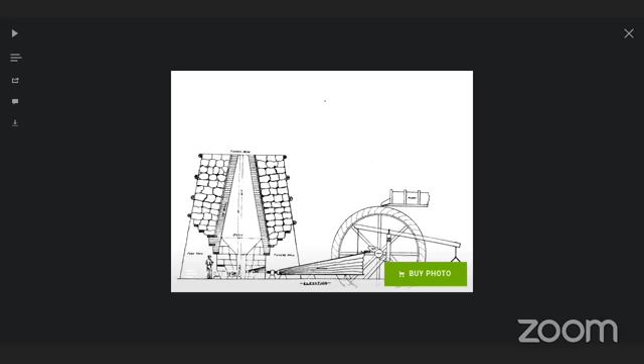So as the furnaces got bigger, if you had enough water, you could just add more water wheels. This one shows a wider water wheel and looks like multiple blowing tubs there. That's what they call the cylinders that actually do the compressing or pumping of the air. And in these days, colonial era, it was very low pressure.

So you have those crank arms extending off of the water wheel and driving rods that go up to crossheads, which take the crank motion and turn it into up and down motion, reciprocating in and out, driving a piston up and down inside the cylinder. Air comes in one side, gets pushed by the piston, leaves out the other side, and goes to the blast furnace from there. Very basic and simple operation.

This is what one would look like in practice. This shows the blowing apparatus at Hopewell Furnace. You can actually go there, once the virus is over, and see this in person. You can see the water wheel driving those elevated tubs up there, and the pipe in the upper top of the photograph connects the blowing tubs to the furnace.

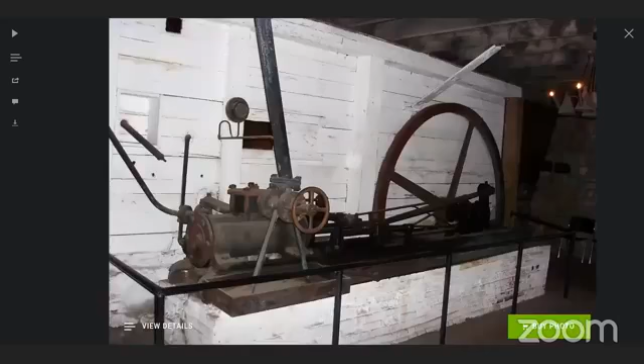So as blast furnaces evolved and got larger, and in other cases just kept on running and running, and having to face competition from new producers, management looked at ways of improving efficiency. One way was converting from water power to steam power. Water power could be unreliable if you had a drought, or some other use for the water.

But steam engines could take a relatively small amount of water, boil it, convert it to steam, and then the steam would be used in the engine to propel the blowing tubs, which would provide air for the furnace. So this is an example from Cornwall Furnace.

That was a colonial era furnace that had been around for quite a while, but they upgraded it in 1841 with a steam engine built by West Point Foundry. So instead of putting in a whole brand new design, they took the steam engine, extended the crankshaft through the wall, and geared it to a set of blowing tubs that look a lot like what you saw at Joanna Furnace.

So you have this basic 18th century technology that was just enhanced a little bit, and that served this furnace into the 1880s when it was shut down. You can see that same basic wooden blowing tub apparatus up there that pumped air into the furnace. But with a machine made of wood like this, the pressures were fairly low, and the furnace it was driving was only a few dozen feet high.

As furnaces got more advanced, they had to get air in at higher pressure to keep up with the competition. So what you see here is the next step of blowing engine design, where they got away from that colonial era wooden blowing tubs and water wheel setup.

This is a regular steam engine, fairly similar to a standard design as far as steam engines go. You could make the flywheel a little different, belt it up, add a governor, and it would function like in any factory setting. But what you started seeing in the mid-19th century was engines really designed specifically for blowing purposes, with the tubs integrated into the engine design.

You can see one of these furnaces here at Carrick Furnace in Metal, Pennsylvania. For those of you watching, you've probably heard about the East Broad Top Railroad - this is not all that far away from there. So if you're heading out in that direction, it's worth looking up Metal, Pennsylvania, and you can actually see this from the side of the road.

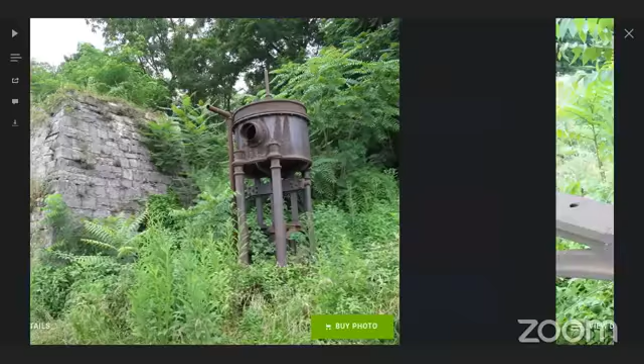So they had an older charcoal furnace that they wanted to keep running in the 1870s. In 1879, they purchased this blowing engine from Weimer, a company that specialized in producing these types of engines. It's completely vertical in nature. That blowing tub is just like those colonial furnaces at the very top, but now made of cast iron, and the steam engine was directly connected to it with a piston rod that went from the engine cylinder, at the bottom of the blowing engine, straight up to the top.

And there was a crosshead that would drive a pair of flywheels down at the bottom. They're a bit obscured by the weeds, but you can just barely see one poking out there. But this design lasted for decades, the general arrangement at least.

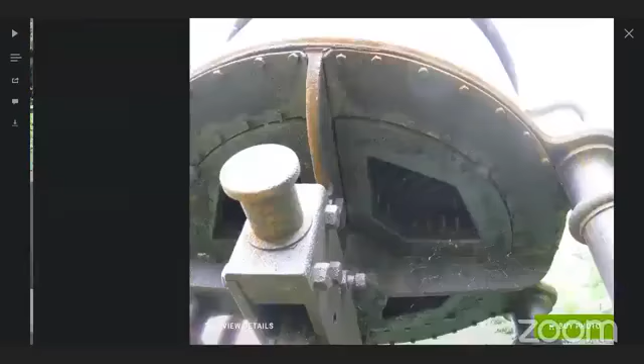So we can move on to see what was common in the 1890s. Actually, along the way, I forgot about this image - this is another variation from that same manufacturer. They put the steam engine horizontally, and added a second blowing tub, connected on the outside of the flywheels. This is a very common type of blowing engine from the 1870s, 1880s era.

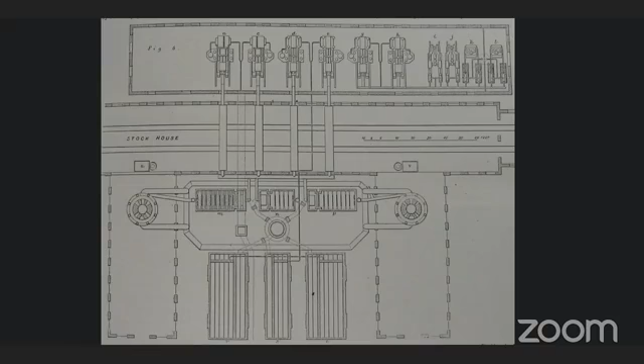Now in Bethlehem, the first blowing engines were built by the Bush Hill Iron Works in Philadelphia, but by the 1870s, Bethlehem had advanced to the point where they had their own foundries and machine shops, and they were in a place to build not only their own engines, but furnaces and buildings from the ground up by themselves. So Chief Engineer John Fritz, as he was planning the new pair of blast furnaces, number 5 and 6, in the 1870s, decided that he was going to take a crack at establishing his own blowing engines.

They were not shut down because they were worn out. They were continuously maintained, but they were shut down because they were lacking in efficiency compared to much more modern technology. When you look at period literature from the time these things were replaced, they were wondering what's going to come around in 10 years. Would it be gas engines, turbines? What was going to be the thing that would supersede the technology that was replacing these things? And they figured that no matter what they did, the machinery was going to be so well built and maintained that it would be as good as new the day they took it out of service. And that would only be happening because something better came along.

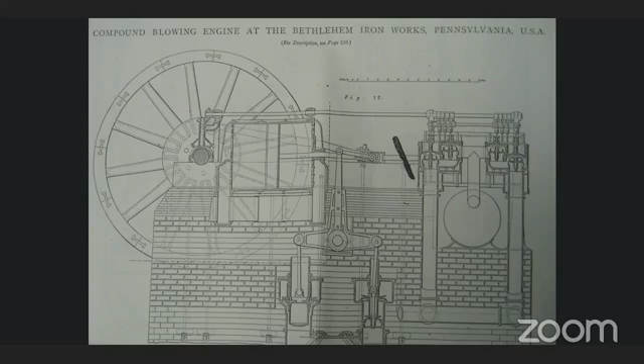So what we notice about this engine compared to the other ones is this engine has a much larger flywheel that helped it maintain momentum much better. And the engine itself is off on the right. The blowing tub is just to the right of the crankshaft in the middle of the flywheel. And again, it's a fairly simple construction. Piston rod goes from the engine to the blowing tub, and it moves that piston back and forth all day long, pumping air into the furnace through the stoves.

What made this engine unique, though, is that compared to those earlier engines, which were all single cylinder, this one is 2 cylinders. You can see it right here. Small cylinder, this is on the left-hand side of the photograph I'm looking at. Small cylinder on the right, big cylinder on the left, joined together. And you can see faintly the big blowing tub behind them. This is a compound engine, so the steam gets used in the small cylinder, and then it gets piped to the larger cylinder used the second time. It's the same basic process that the Corliss steam engine in the museum today uses.

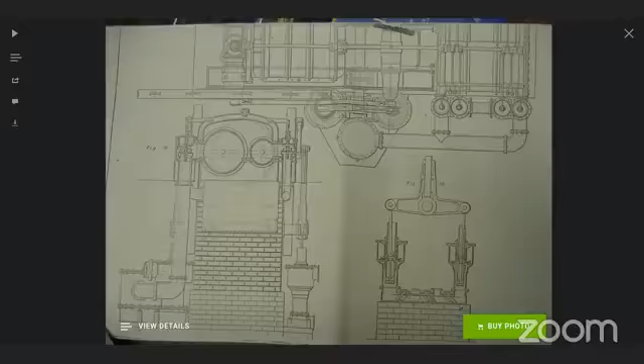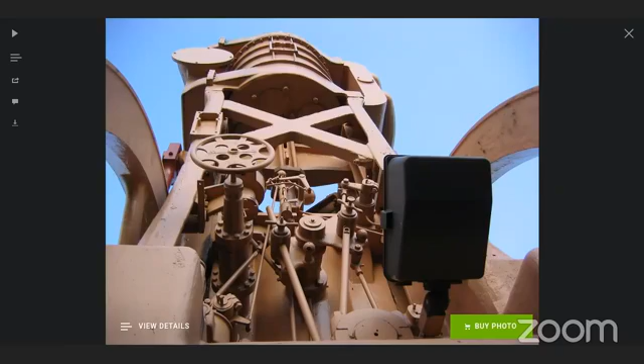Again, the same type of valve gear on the big steam engine inside the museum today. The Corliss valve gear allowed the engine to have a much lower fuel usage rate, which was important in the steel mill because they were burning blast furnace gas, which is a byproduct from the furnace, under boilers to make steam. And the less steam they could send to the engine meant more steam available for other purposes.

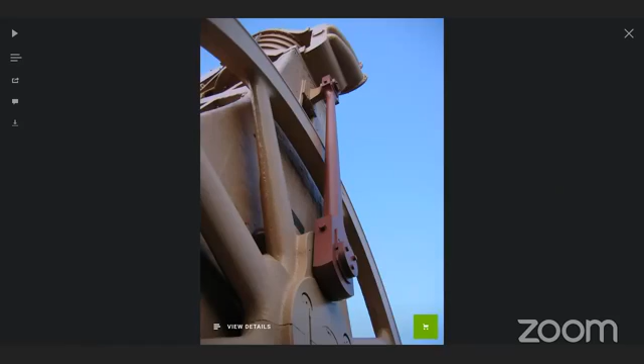So you can see pretty clearly here, you've got the steam cylinder on the bottom, the cross head that goes above the flywheel, and then rods extend down below that to actually rotate the flywheel. And all the flywheel does is maintain momentum and keep the engine running smoother. Because if you didn't have that flywheel, this would be just strictly reciprocating motion, starting and stopping. The flywheel helps the engine spin around much more freely and carry it past those dead spots at the top and bottom of the stroke.

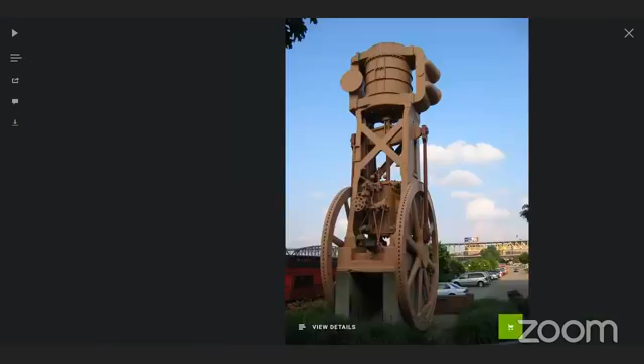Just a few more views of this engine. This thing is really massive. I think the flywheel's somewhere in the neighborhood of 16 to 18 feet in diameter.

When these were set up in a furnace situation, you might have one for a very small furnace, but typically furnaces were built in groups of 2, 3, 4, or 5. Bethlehem even had visions of 8 furnaces on their planning books at one time. So these engines would be installed in rows.

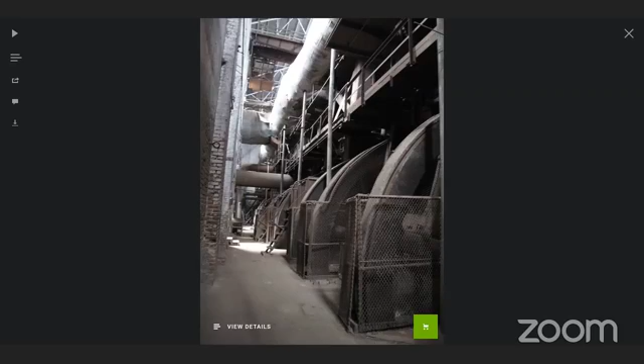The flip side of that is it also makes the engines much more difficult to work with. So if you have to go and do a repair, you have a lot more difficulty getting access to those parts.

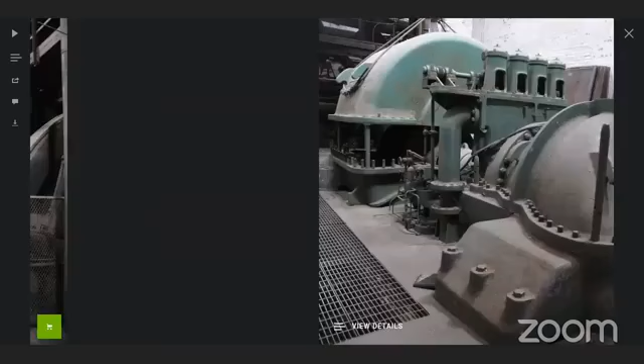Now we're skipping ahead a little bit here, but since we're still talking about steam engines, this is a good point to introduce what ultimately ended up surpassing the actual engines themselves. When you think about engines, you have all of these reciprocating parts moving up and down, starting and stopping, and the complicated valve gear mechanism to control the timing of when those events happen.

But if you can have a steam-powered turbine blowing the air, then your operation gets a lot simpler. In the early days, these really weren't cost effective, but as they got much more powerful over the decades, they eventually became the industry leader and are in use at the blast furnaces that are still in use today.

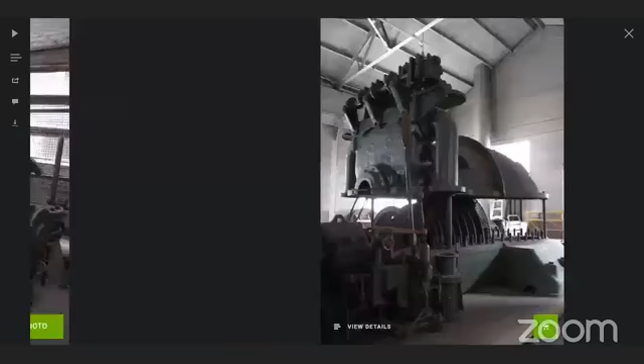So what you see here on the right-hand side of the image is a steam turbine, and on the left is the actual blower mechanism. This is again at Sloss. You can see the turbine's been lifted up, so you can see the turbine blading exposed.

The steam would actually go in, hit one blade of the one set of the turbine, exhaust into the second series of blades, and on and on. So that steam would get used multiple times. The device you see at the very top is a governor.

And this is what the turbine rotor looks like from the Bethlehem turbo blowers. There used to be 3 of these in Bethlehem. We'll hopefully discuss those a little bit later, so they make sense in terms of Bethlehem's evolution. But that's what's left of one of the Bethlehem turbines.

This is the actual blowing end. Notice you'll see a good local name on that, Ingersoll Rand. They built a good number of these turbo blowers. One of their primary businesses was making machines for compressing air. And these turbo blowers basically did the same thing.

The boundary line between, traditionally at least, when you say something's being a compressor versus a blower is about 30 pounds per square inch. So in the mid-20th century, you're getting blast pressures up to about 30 psi. And even at lower pressures, the same basic technology of compressing air is what you're doing, just you're emphasizing volume over pressure with these types of engines.

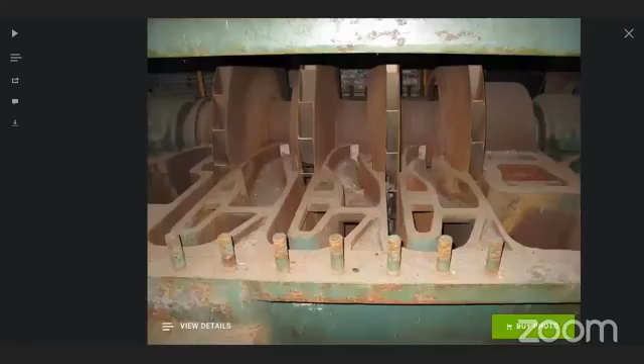So this is a look inside that turbo blower casing. You can see 1, 2, 3, 4 units in there, and they pick up the air, spin it around, pump it out the other side at a high pressure. And these things could get up to some really impressive numbers of cubic feet per minute.

Like the Bethlehem turbines, they could do well over 100,000 cubic feet a minute. So to put that in perspective, the average person breathes about a little over a quarter of a cubic foot of air per minute. So we'll keep that in mind as we go down and hear about some of these figures with the engines themselves later on.

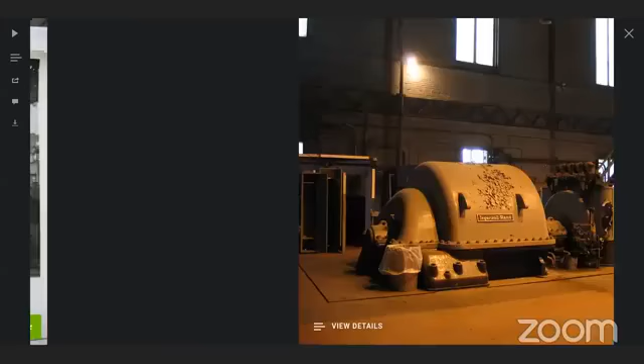As I mentioned, these things are really the mainstay of the modern blast furnace blowing plant. This is a shot from a pair of turbo blowers at Wheeling, Pittsburgh, Steubenville, Ohio operation. It's been demolished, but you can tell that these were maintained and operated well into the modern era.

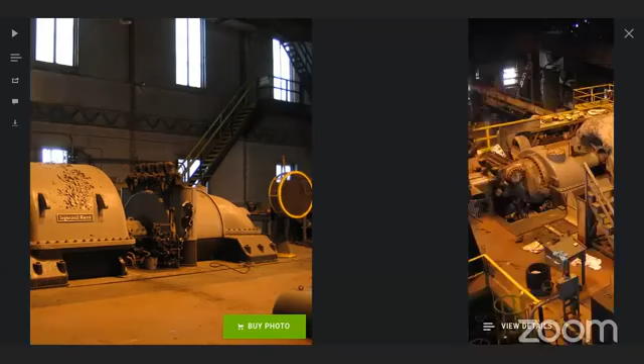In another view, you can see that these turbines take up a relatively small amount of space compared to the engines that we're going to start seeing momentarily.

One important thing to note about those engines is that they run on steam. Same thing with the turbo blowers you just saw, but the steam has to be made somehow. It comes from gas, which is a byproduct of blast furnace operation.

The gas is mostly carbon monoxide. You can see in this chart the raw materials going into the blast furnace: almost 2 tons of ore, a little over a ton of coke, and almost 5 tons of air that gets pumped into the blast furnace to make a little bit over 1 ton of iron.

So when you look at all that air flowing into the furnace, you have to look at what's coming out of it, and you're getting well over 13,000 pounds of gas associated with every ton of iron you make. That gas is mostly carbon monoxide, and it has a BTU value of about 95 to 100 BTUs. That's British thermal units, a means of measuring how potent the gas is.

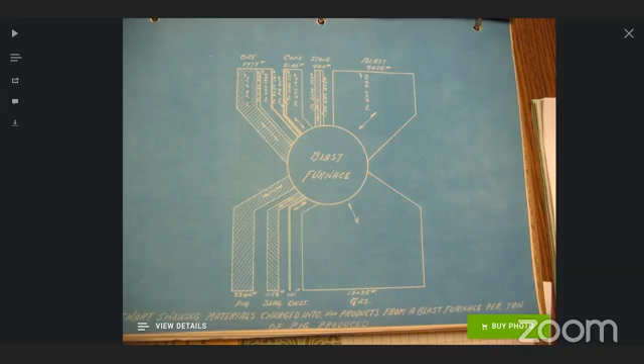For comparison, natural gas is a little bit over 1,000 BTUs. So even though this was only a tenth the heating value of natural gas, you have so much of it that if you can harness it and use it, you basically get free fuel.

When Bethlehem Iron Company and Bethlehem Steel were trying to figure out how to deal with their expansion plans and fuel the plant, they were looking at their boilers for their steam engines at the time, and they realized that some of the steam was coming from coal-fired power plants, and they were spending upwards of $1 million a year on coal.

But if they could harness that blast furnace gas a little bit better from their bigger furnaces that they were planning to build, they could put that blast furnace gas to use - not in boilers that would inefficiently convert the energy to steam, but take it directly to the engines.

So they started looking at what the Europeans were doing, because fuel costs in Europe were much higher at the time. The Europeans were a little bit further ahead in their development of gas engines that could utilize blast furnace gas as a byproduct from the furnace.

They looked at some of the leading examples in Europe and found a Nurnberg design of engine. They decided, along with a lot of other steel companies in the United States, that this was really the way to go. If you think about your automobile engine, this is really comparable to a 4-cylinder car engine. It looks a lot different, but it functions in the same basic fashion.

Instead of having 4 independent cylinders, this has what they call 4 cylinders arranged - and this gets a little confusing - but for practical purposes, 2 double-acting cylinders. This is an exploded view showing how you would pull the parts out for installation or repair. You have a cylinder on the left, one in the middle, and then you have your crankshaft on the right.

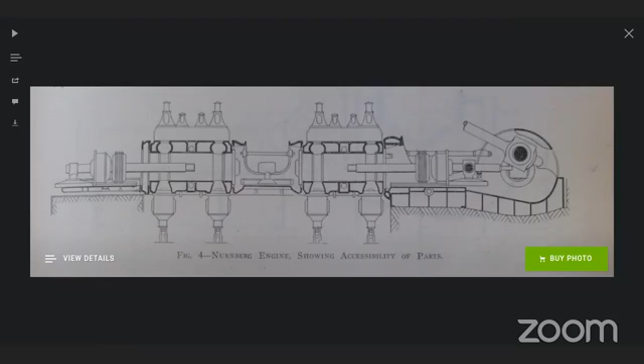But basically, if you didn't do this, you would have 1 cylinder making 1 stroke, and then you'd have to let the flywheel revolve 2 times before it could come back and start the process over, because you have to suck gas in, compress it, ignite it, and then exhaust it - that's your 4 cycles. So if you can have 4 places on the engine where this is happening, there's always one of those places where it's going to be firing and actually making power.

So Bethlehem was not the first company to build these engines in the United States. There were actually several.

Sorry about my computer freezing again.

This made access to the cylinders a little bit more difficult than it had to be. But it might have saved a little bit of space. So there were always trade-offs that you were looking at in producing these engines.

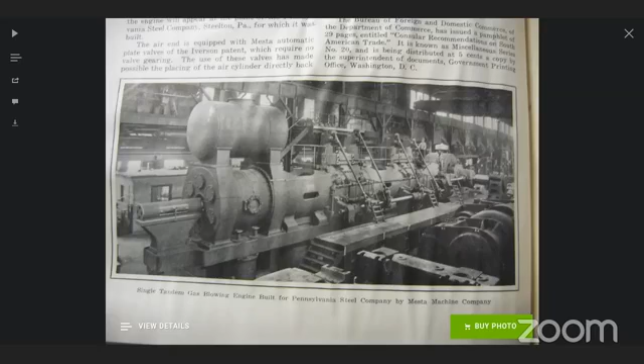Back when they were first built, they were figuring one furnace would require 2 engines to supply the air to it. And then for every 4 or 5 furnaces, you would have a spare engine, because it was inevitable at some point one would break down. You'd have to do routine maintenance, like changing the points, or in later years, the spark plugs. So you always try to keep a reserve on hand.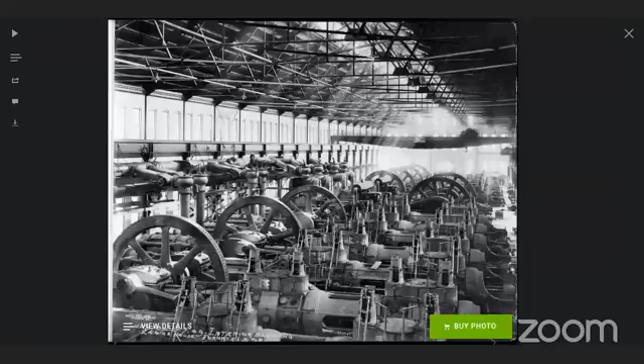This is just another view showing how large these places could be. When you have several furnaces, these powerhouses really started lengthening almost to the point where it's hard to see the end of them and hard to count the engines. Bethlehem at its peak had 17 blowing engines, all at the same time.

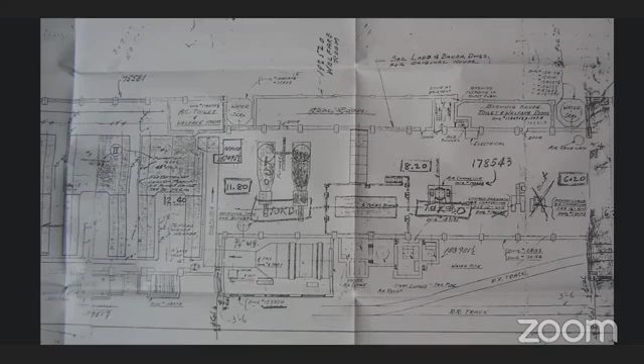They were gradually replaced by the turbo blowers, because when you look at the mathematics behind it, there was just no competition between these engines and the much more modern turbos. You can also see that they were in a much narrower space. The circles, hopefully I can zoom in on them, were for blowing tubs that were vertical, so they didn't need as much of a horizontal footprint. So this building was actually narrower.

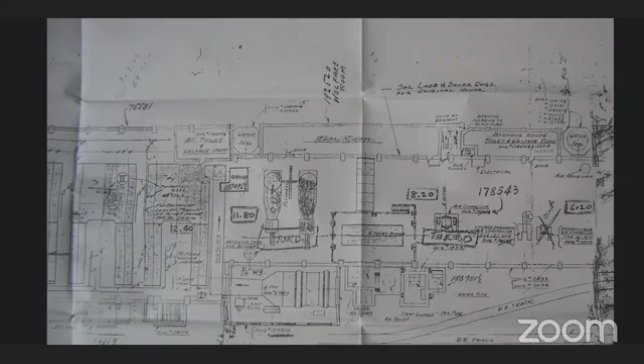And after this engine was taken out, you had the turbos take their place, which were even smaller than those engines. But you can look on the left and see another gas engine powerhouse that made electric power, but the same basic design of engines. You can see the footprint is much, much wider. And the footprint is actually a big deal in these engines.

In Bethlehem, that design just barely worked. They were able to come fairly close to the railroad tracks, but not interfere with them. But in other facilities, they actually angled the engines to make them fit.

One thing that you can note in here, and we'll talk about this later, is the exhaust gas tunnel. The engines today have individual stacks, but there used to be a tunnel that funneled the exhaust gases to a central stack. A few more architectural drawings showing the width of the building, how it's constructed.

And again, that placement against the furnaces is key. You can see 1, 2, 3, 4, 5 big pipes on the outside of the building. Each one of those pipes goes to a blast furnace, and those pipes are what carry the air from the blowing engines to the furnaces.

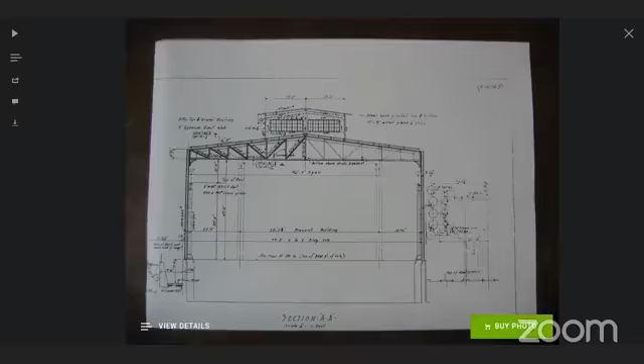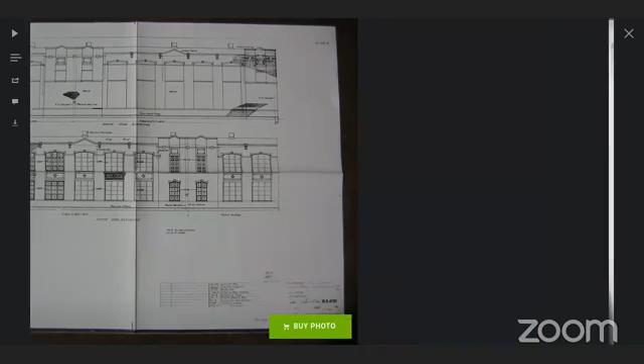And the building was absolutely beautiful, and to this day, it still is. Brick construction, windows, it was very bright on the inside. It was actually illuminated from both ends of the building. And white tile on the inside. It was really, really, really classy.

And it had a sister building, we hopefully can talk more about this at another time, that made electrical power with the same basic types of engines. And this one even had a very nice concrete sign cast right into the building. It said gas engine powerhouse. And when this building was demolished, the concrete piece here was actually salvaged, and we have it in storage for the museum today.

If you're looking at old photographs, you can tell the difference between them, because there are 7 AC engines, and they all had waste heat boilers, which were these boxes outside the buildings, whereas the blowing engines, there were 17 of those, and only 4 waste heat boilers associated with the more modern engines. And then between them was this narrower section that had the Southwark steam engines, and in later years, the turbo blowers.

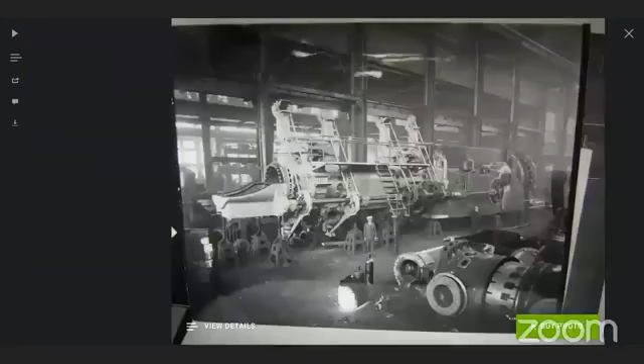So again, Bethlehem had a tradition of building things themselves. So when it came time to invest in gas engines, they thought about it and decided why buy from another company when they had the facilities right here in Bethlehem to build their own. So that's exactly what they did. They had foundries within an ear shot.

The building that used to house the Bessemer converters by this time was doing iron castings. Number 4 machine shop, I believe it was, one of the machine shops directly nearby that foundry, it's gone today, was in a position where they could actually do the machine work on these. Number 2 machine shop did repair work for them. And you could actually build and maintain these things right on site.

So this is a photograph taken as one of the engines was under construction. You can see they have it up on stands as they're in the process of test fitting everything together. And you can also see a cylinder for a second engine in the foreground and other components scattered around. We're going to move now into the actual engine house itself and start discussing how these things actually worked.

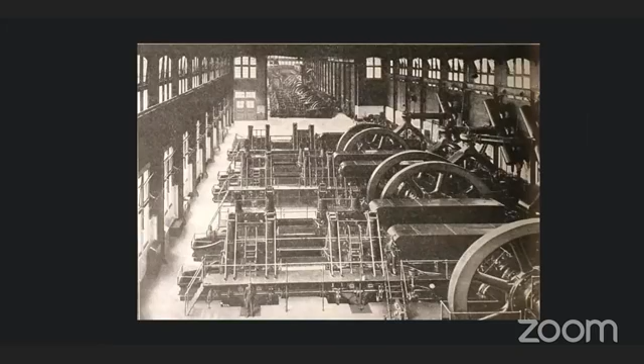So this is a view of those first 5 engines that were installed and actually got put in service in 1911. You can see the building gets narrower, and then there's a bunch of other engines in the background. Those were electric generating engines from a slightly earlier time period, and those eventually got torn out. And the Blowing Engine house expanded, and the current engines replaced those engines. Then you have the Southwark steam engines, those vertical horizontal engines. I'm trying to zoom in on that image so you can see them better.

Well, it's not letting me zoom in, but anyways, in the far back of the photograph, you can see those flywheels, and there's a vertical component there. Those are the blowing tubs for the steam blowing engines, and that's about the spot where the overlook exists today on the Hoover Mason Trestle, where you'll be looking into the Blowing Engine house that has since expanded into that direction.

So Bethlehem didn't build engines just for the Bethlehem plant. They also built them for the Maryland Steel Company, which eventually became a wholly owned subsidiary of Bethlehem Steel, which was their Sparrows Point plant. They built them for the Lackawanna plant, and several other installations throughout the country.

So the way these engines work is they're horizontal engines, and the parts inside them are so heavy that instead of the piston carrying the entire weight inside the cylinder, they actually have a piece that comes out called the tailpiece that rides on the slipper on a track or guideway that takes some of the weight off. They have a second one of those hidden away in the middle of the engine.

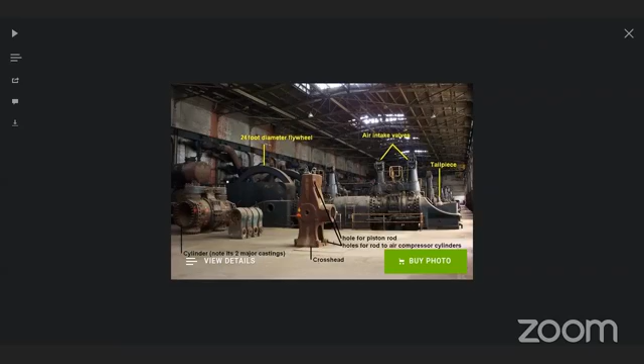Then a third one, which is, you can see a spare example here labeled crosshead, connects to the piston rod on the right. And then at the top and bottom, there's holes for additional rods that connect back to another crosshead, which then in mirror image feeds into a piston rod and piston for the blowing cylinder. You can see air intake is up on the top.

And I wanted to throw this in just so you guys can read it momentarily. But this is a page from the manual that shows the engine sizes, gas engine cylinders. They're 42-inch diameter on the smaller engines, up to 47 inches in diameter on the big engines. And again, this is because they were burning blast furnace gas, which had a relatively low BTU value to it. If you were burning natural gas that was much more potent, you could have a smaller cylinder and get the same amount of power. But with the blast furnace gas, you had to have a larger cylinder to get the same amount of energy out of it.

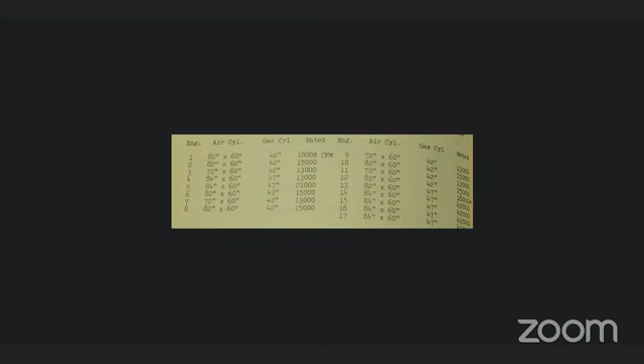They're rated in cubic feet per minute, so the smallest engines were about 13,000 cubic feet per minute. And if we go back to our example of how many cubic feet a minute a person blows, which is a little over a quarter of a cubic foot per minute, it would require about 48,246 people to equal the capacity of the smallest blowing engine. And if you think about a hot air balloon, an average size hot air balloon might have 65,000 cubic feet of air inside of it. So a small blowing engine would take 5 minutes to pump that much air, but one of the larger engines in Bethlehem would only take a minute and a half to do the equivalent of filling up a hot air balloon.

So the cylinder is down at the bottom. We're moving on the left-hand side of the image. You'll see this slightly convex valve down there. That's actually a poppet valve that moves up and down. And that's what seals off the cylinders from the airflow. Then you have a series of springs up on top. And then there's an arm at the top that gets activated to push that valve down. So when that valve comes down, it brings in a mixture of air and gas. We can zoom in here and see how that air and gas actually comes in.

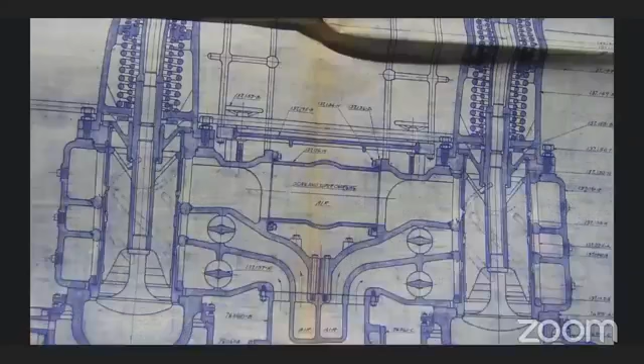The gas is piped in from the basement, and that's a very dangerous place to be. If there was ever a leak, you could get overcome by carbon monoxide pretty easily. So if anybody ever had to go down there, they worked on the buddy system in case somebody didn't come back up. They could run down for help. It goes through valves, and then it gets mixed in the chamber up here, and you have a sleeve valve here that rotates around. This is a very interesting situation. The sleeve mixing valve has these spirals cut into it, and as the engine throttle operates, it twists this sleeve, which is aligned vertically, back and forth, and that automatically adjusts and maintains the proper proportion of air and gas mixture. And you can throttle it up and down depending on what your load was like.

Even though these engines had to run basically continuously, the furnaces themselves didn't always need the same amount of air. If you were going to be tapping the iron out of the furnace, you would want to have less air blowing, so you're not having a rush of air pushing that iron out. You wanted to have that much lighter, so the engines would sometimes have to be throttled back. So by twisting this valve, you can control the amount of fuel and air that comes into the engine. And then as the valve itself moves up and down, that actually does the admission. And then there's a similar setup, but without the twisting sleeve at the very bottom for the exhaust valves. This is what it looks like looking down into there. So you can see the different passageways where the air and gas would come in.

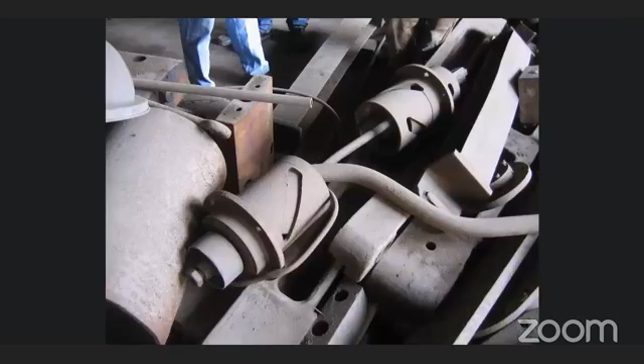And these are some of those sleeve valves that would actually twist back and forth, depending on how much fuel and air you needed to mix into the engine.

A shot of the exhaust valve looking down, and you can see again how beautiful this engine house was. Even in the pits underneath the engine, they were lining them with red quarry tile, and it looked beautiful.

Up until the late 20th century, this was a place where you could go in, and multiple people have said you could eat off of the floor of this building. They had mops stationed by the engines. The brass was polished. These guys really took a lot of pride in their machinery. And when the president of the company came to visit, this is one of the places that they would show off to him and to visitors.

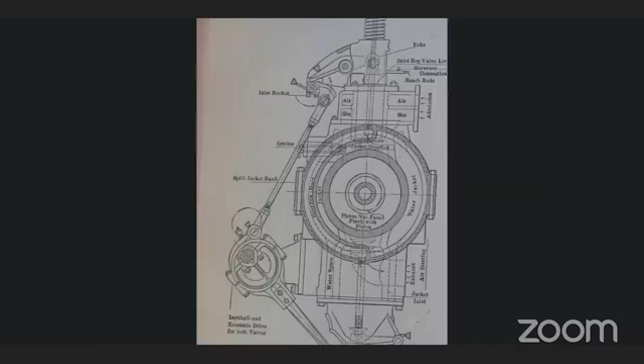This is just another example of showing that cutaway of how the fuel and air came into the engine. The exhaust valve is a little bit more visible here. You can see the eccentric shaft alongside the engine, just like the Corliss steam engine we have, it has eccentrics. You can see it in the lower left here. They revolve around a shaft and provide a linear motion from the straps around them that open and close the corresponding valves.

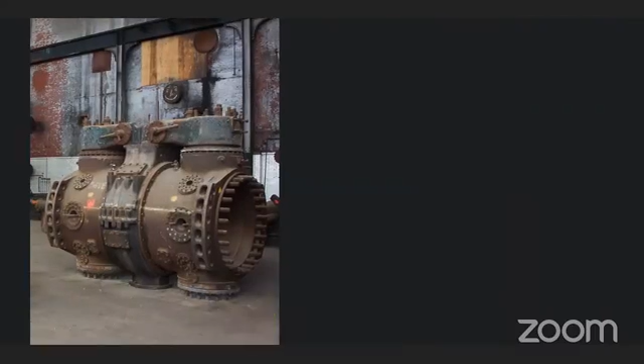The cylinders themselves are very unique too. You'll notice this isn't one cylinder - well, the cylinder isn't made from one casting, it's made of multiple pieces. You have your front, your back, and there's probably different technical terms for these, but this is easier to explain in this image, and then this piece that clamps down around them. So when you look at that in cross section, you can see you have your left and right pieces, and they're joined together in the middle by prisoners, or dog bones, depending on who you're talking to. These are pieces of steel that have been heated up, put into place, and shrunk down, and as they shrink, they bind this together very, very firmly.

These castings were subjected to such tremendous temperature differentials that they actually made them out of steel. And then only the actual cylinder liner, which is the tube inside the cylinder castings, was only made from cast iron. And then you can see that the piece that clamps around it is the gas passage, and to the left and right of that, you have a hollow space, again, inside the cast iron cylinder halves, that's filled with water to keep the engine cool.

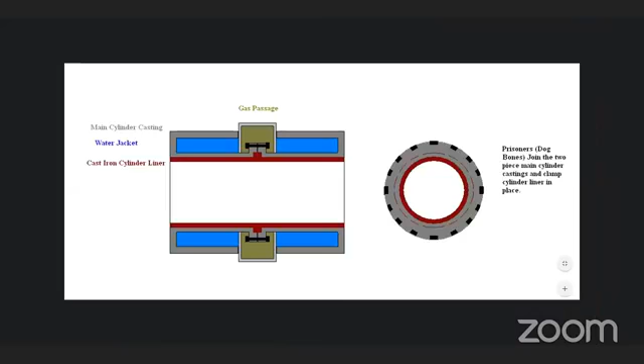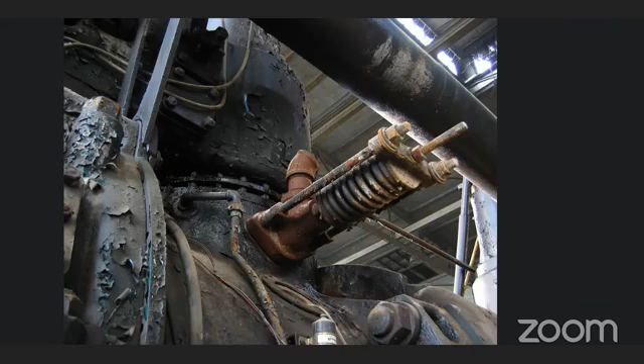The pressure inside the engines was supposed to be about 350 PSI, that's pounds per square inch, as the explosion occurred when the gas was ignited. If the pressure got a little bit too high, then this safety valve up here would go into action. The valve would open up against the spring, and the excess pressure would be released into the room there.

Now, the exhaust temperature was so intense on these things that you could actually take the exhaust at 1250 degrees, and on the larger engines, run that through waste heat boilers and make steam. So between the 4 boilers here and the 7 boilers with the electric generating engines, they actually made 8% of the plant's steam needs. That was very helpful in running turbo blowers and other steam-powered devices, and again, saved a tremendous amount on your fuel bill.

And when you looked at the efficiency of these engines, the gas engines operating by themselves were about 25 to 30% efficient. But when you added in these waste heat boilers, then you got an efficiency of around 50%, which was really, really good even in this day.

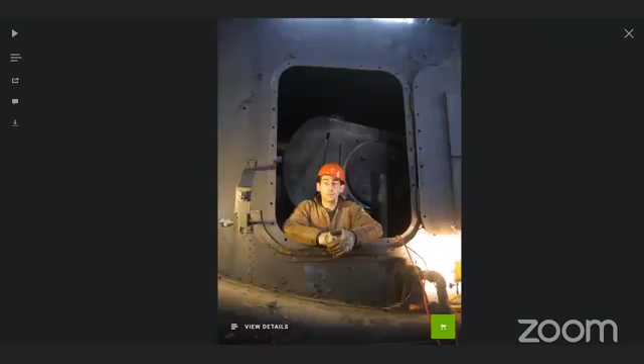So after you get the reciprocating motion from the pistons, you have your crosshead that takes the motion to a driving rod, which spins a crank. All of this stuff is enclosed in shrouding, so it's a bit hard to see. But whenever volunteer Rick Rowlands crawled inside there, this is probably 10, 11, 12 years ago, you can get an idea from him just how big that crank is by how it dwarfs him.

These engines have a 60-inch stroke, so that means every time the piston fired, everything inside moved back and forth 5 feet.

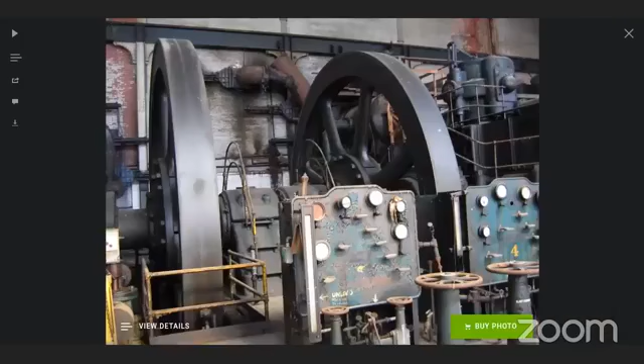Between the motion and the heat, these engines were mounted a bit differently than other ones. The casting that he's standing in, the frame of the engine, is bolted down and anchored over 12 feet deep into the foundation, with concrete still deeper below that. Those anchor bolts hold down the frame of the engine, but the actual cylinders sit on a track so they can move linearly and expand. There wasn't a whole lot of expansion, but enough that if they were bolted down, you might break the bolts or cause damage, so they wanted the engine free to expand as it grows.

The early engines were single engines, meaning you had your gas cylinders, your air cylinder, and a flywheel - one engine and one flywheel. They thought this was a very logical way of going about it, and it saved on cost for producing the pieces, but these engines only had about 1,500 to 1,800 horsepower. They were happy with that in the early years, but by the 1920s they realized that if they built bigger engines with bigger cylinders and combined two engines into one, they could reduce two flywheels into one and have what they call twin engines, with a left-hand and a right-hand side engine tied together by a common crankshaft.

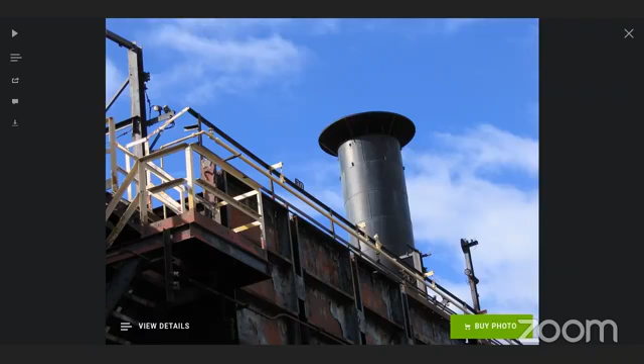So we talked about the actual power of the engines. Now is a good time to talk about the air. If you're on the Hoover Mason Trestle, you can look up at the eastern end of the engine house and see this big thing that looks like a smokestack. That's not a smokestack - that's actually an air intake stack, located as far away as they could reasonably get it from the blast furnaces. Even with all those dust control measures, there was still dust, and you wanted that air to be as clean as possible. So this stack took the air and funneled it into the basement of the building.

By this time, the blowing engine house with the reciprocating gas engines was 540 feet long, plus an extension for the turbo blowers. If you only had 2 guys in the entire building, odds are you're not going to be able to keep as good an eye on things as you might want to. So when you compress air, the air heats up, and if you keep compressing the same air, the heat keeps building up and building up. If there was a malfunction and you weren't watching that temperature gauge, the thermometer there, the temperature of the air could get to such a point that the lubricating oils left over would actually ignite.

And that's what happened in 1993. They had a fire in the cold blast main, which for practical purposes really amounted to what I would call an explosion, even though it was technically a fire. That blew out some fittings, a valve on top, and did some other damage. You can still see that from the Hoover Mason Trestle today when you look into that blowing engine house.

After they had compressed the air, it was sent into an air reservoir tank and then through what they call a Dibley valve. This was named for the chief engineer of the Joliet plant of the Illinois Steel Company, who invented this special valve that would automatically lift up and pump air into the mains going to the furnaces. But it was also designed so that if the engine shut down, the valve would automatically close. It has a counterweight positioned just right so that the valve would descend slowly and not come crashing down.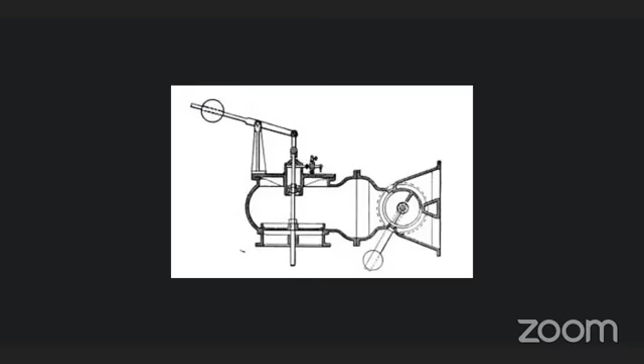So after it lifted that Dibley valve, it went into the manifold here. You can see 1, 2, 3, 4, and there's a 5th on a lot of these. These are valves that take it to the various furnaces, so you could actually have any engine blown by any furnace or any furnace blown by any engine. That gave you a lot of flexibility.

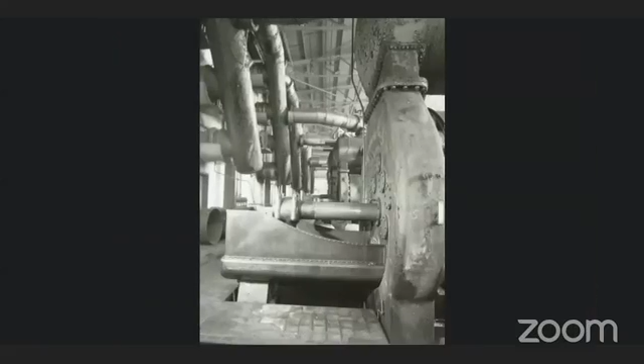And of course, at the other end, you have these blowing pistons. They're about 72 to 84 inches in diameter, depending on the engine. And again, they had this cross slide on the back, the slipper, that would allow you to take some of the weight off of the actual piston and reduce the amount of wear on it.

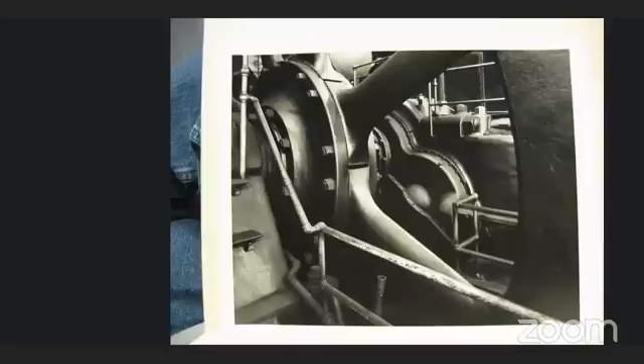These early engines were 1911 versions, the singles, which stayed in service until the very end. But in 1927, they expanded the engine house and put in the twin engines. You can see in comparison to the singles, which had 2 flywheels, really one for each engine, just side by side, mirror images of each other, the twins have 1 flywheel. By the time you added in the larger cylinder diameters, you're looking at about 5,000 horsepower coming out of these engines.

Unfortunately, I don't have a record of this worker's name, but he's standing at the control panel here. These were shots by Joe Elliott, and you can actually see what the workers had to manipulate to control the engines.

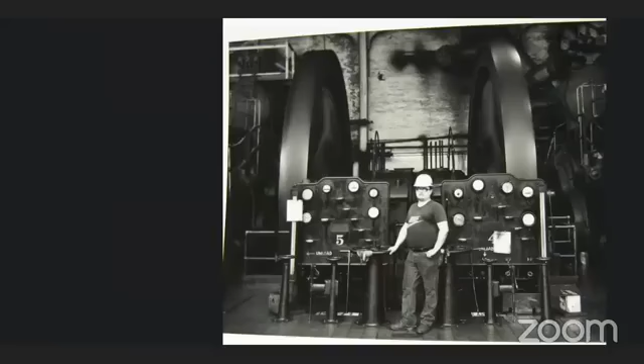You can probably zoom in on this picture a little bit easier than those ones. This shows one of the engines that had some restoration work done to it, and you can see this big valve here. This is for 2 single engines, so you have engine 10 on the right and engine 11 on the left. Blast furnace gas, which is the fuel for the engine, and compressed air to the right of that. What I believe is a quick starting valve for getting the air going. And then you can read the controls on the furnaces.

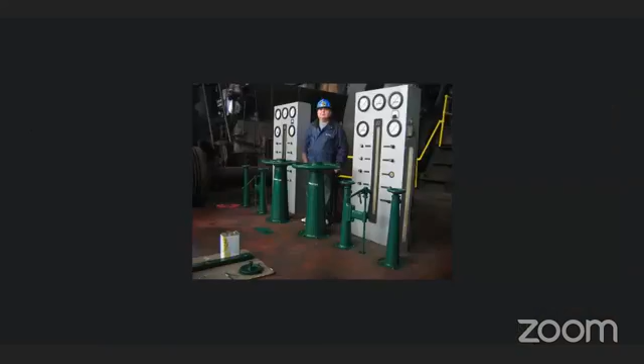Controls on the panel board here. You can direct air to the different furnaces you want. You can check your temperature for oil pressure, how much wind is coming out of the engines. So you can adjust it accordingly depending on what the blast furnaces need.

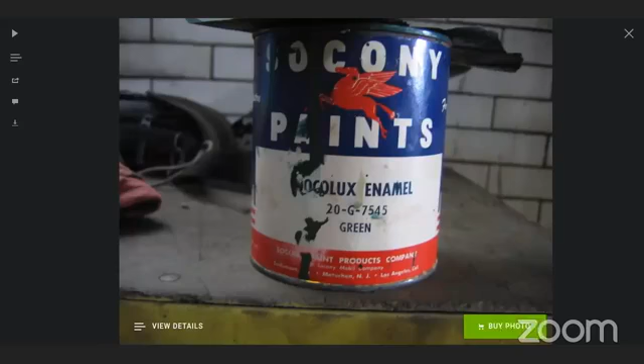This is a good point to notice that these engines are in fresh paint, or at least these components of them. In 2009, we got permission to go in and do some restoration work on them. Their former superintendent, Jim Phillips, he's deceased now, but he worked there in the 1950s, actually saved a can of the original paint, had it in his garage and brought it back to us. We were able to match the color from that original paint because over the years, the engines have faded. And we were able to do some restoration work on engine number 11.

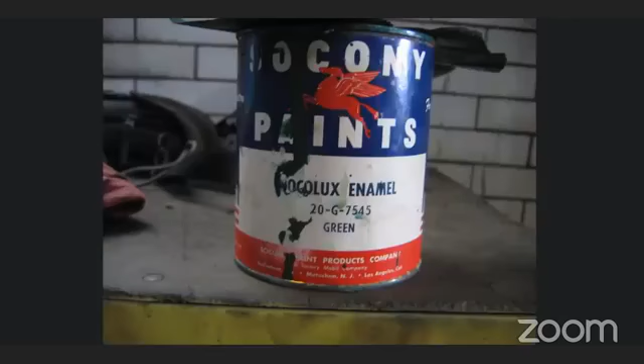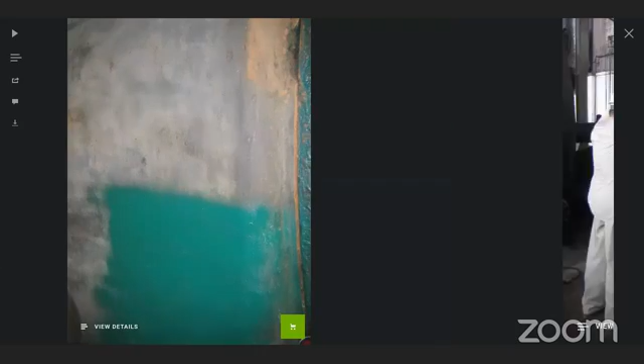At the time, it was felt that if the engine house was ever open to the public, that would be the logical one to restore because it was in the middle of the building. There was an open space where engines 12 and 13 had long ago been removed. This would be a good engine to showcase what it actually looked like when they were in their pristine, brand new condition. We also rigged up a chain hoist to it, a 1-ton chain hoist, so we wouldn't do any damage to it, just a test.

And we found that it was actually still loose. You can see we moved it a couple of inches on the slide. So these engines someday might still have some life left in them. This is the engine as we started with it.

And then the finished product, repainted in the Socony engine green, along with safety yellow on the railings. And this is how the engine looks to this very day. You can see it from the overlook on the Hoover Mason trestle.

Again, there were a lot of details that we didn't have time to cover. This is a topic that really deserves a book in its own right someday. If anybody has any questions, feel free to let us know. And if anybody worked on these, I know there's still some of you out there. We always love to hear stories, record them, and hopefully enhance this presentation and make this a more meaningful experience for the public over the years.

Thank you for having me, Glenn. All right, thank you, Mike.

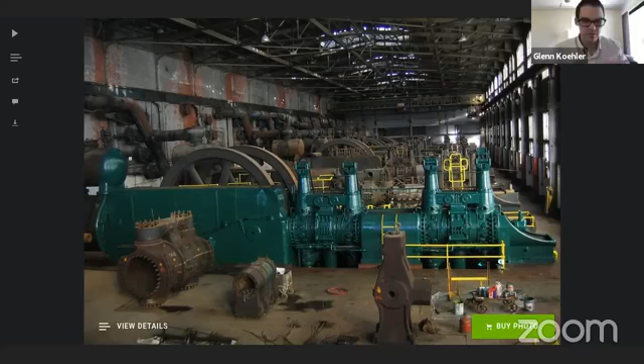This is one of those questions that really depends on who you ask. If you ask people who have a hard time hearing, they say no, it wasn't loud, you could have a conversation right next to them. And then you talk to other guys and they say yeah, it was very loud. So I think the answer is somewhere in between, and it really depends on who the person was and what other experience they had. But you could definitely hear them.

If you were living on Southside Bethlehem up on the mountain and you were trying to go to bed at nighttime, there are stories of guys who would open their window and hear the engines chuffing in the background, and it would lull them to sleep.

Interesting. I don't know if you'll know the answer to this. Romano had asked, in the secondary operation of the blast air temperature chamber, do you know what the temperature was of the chamber converter?

Are we talking like the bustle pipe going into the furnace? That I don't know. But Mike will also pop in the comments too and ask any questions that people might have. Sorry, go ahead, Mike. I'll take a look at the question on Facebook later, and when I see it in front of me in writing, I can probably give a better answer then.